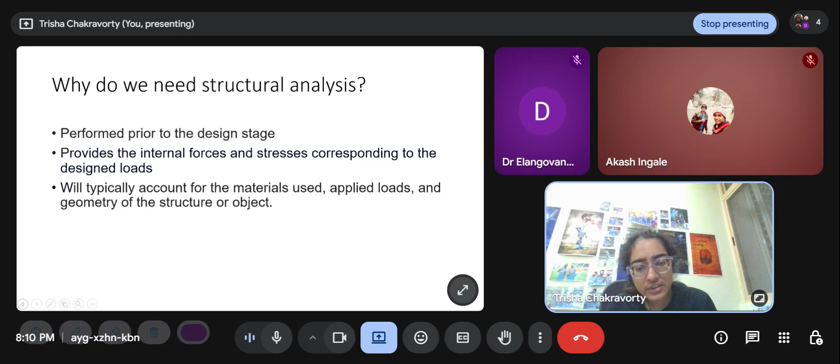Ultimately, our job as structural engineers is to do structural design, and structural analysis is a step before that. So it is performed prior to the design stage. It provides the internal forces and stresses corresponding to the design loads, and it also provides the deflections, typically accounting for the materials used, applied loads, and geometry of the structure.

Now we start with the overview of the course. Phase 1 was analysis of determinate structures, and phase 2 was analysis of indeterminate structures. Only week 12 is left. Tomorrow I'll be covering the topic of week 12, which is stiffness matrix method. Apart from that, we have covered everything. Now, phase 1, week 1.

Types of internal forces. There are four types of internal forces. There is axial force, which is a pulling or pushing kind of force along the length of the beam. Then there is shear force, which is transverse to the beam length, perpendicular to it. And there is bending moment, generally developed due to shear force. That is one. And there is torsion, which is this.

So torsion acts along the length of the beam. You can say that bending moment and shear force are both due to forces perpendicular to the length, and axial force and torsion are both along the length of the beam.

Then there are some common classifications of elements and boundary conditions. Classification of elements includes beams, trusses, and frame elements, the obvious ones. Trusses are made of two force members. All the members can only undergo axial force, so they can be in tension or compression, ensured by the way it is assembled geometrically. So all the members are pin jointed.

Beams typically undergo only bending moment and shear force, so we expect a beam to only have transverse loading, not axial loading. If it has axial loading, it becomes a frame element. But beams and frames are structurally not different, unlike trusses. Trusses have all members pin jointed, so the load is always redistributed such that all members act as two force members. But that is not true for beams or frames.

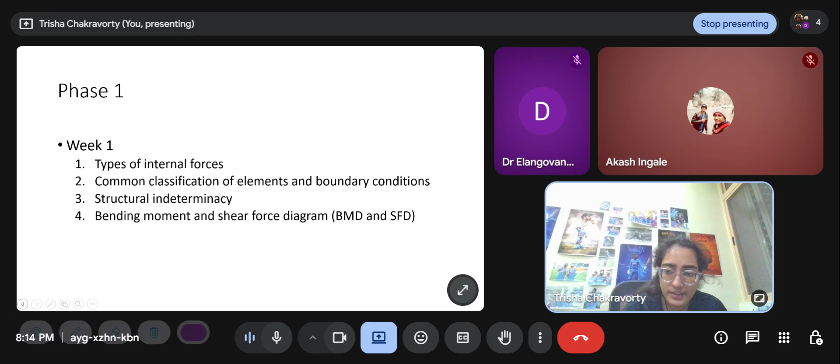Bending moment is moment that occurs when an external force is applied to the element, causing it to bend. Shear force is force that acts parallel to the cross section of a structural element when an external force is applied. Torsional moment is moment produced by a twisting force applied to the body along the transverse axis. And axial force is force that acts in the direction of the axis of a body.

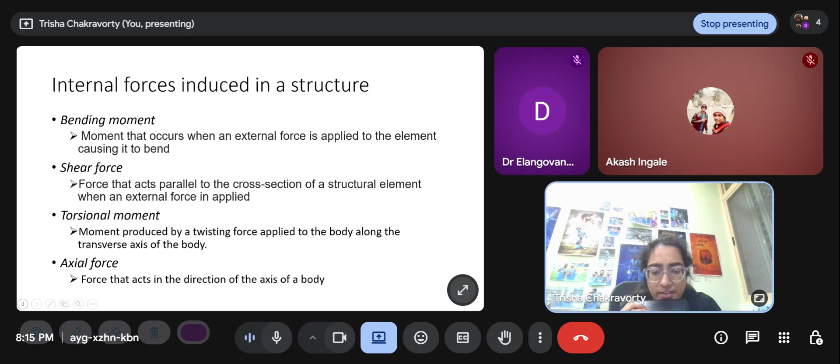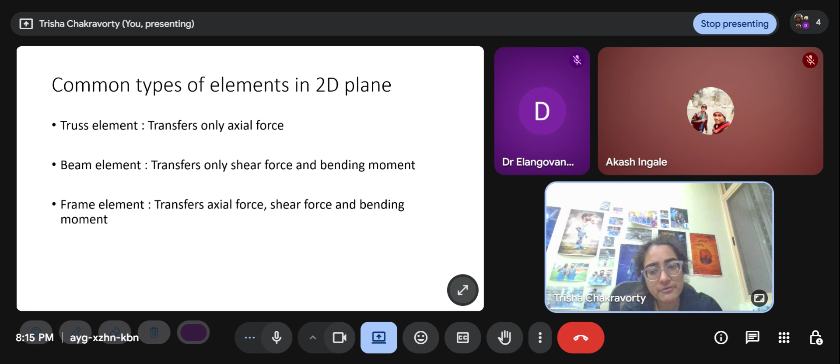Truss element transfers only axial force. Beam element transfers only shear force and bending moment. Frame element transfers axial force, shear force, and bending moment.

Roller support restricts displacement only in the direction perpendicular to it. Hinge support restricts displacement in both directions but not rotation. And fixed support restricts displacement in both directions and out of plane moment as well.

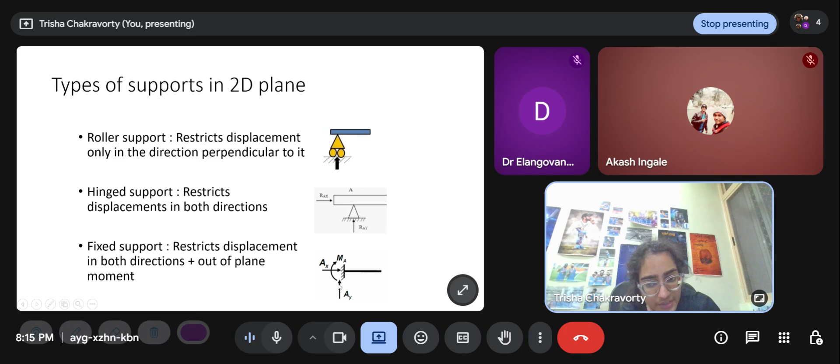Structural indeterminacy: structures that cannot be analyzed using statics or equations of equilibrium only are called indeterminate structures. They require other material properties to be solved. The degree of indeterminacy is the number of unknowns minus the number of equations of equilibrium - this is the static indeterminacy. External indeterminacy and internal indeterminacy add up to give the total degree of structural indeterminacy.

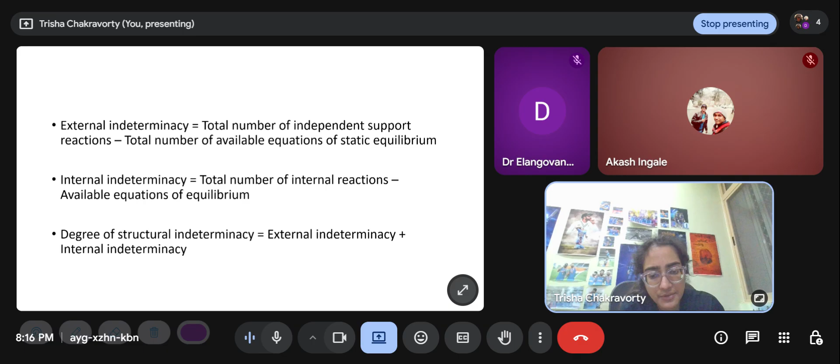Examples: this is a cantilever beam. It is determinate since it has three equations of equilibrium. In the 2D plane, it is always three: sigma fx equal to 0, sigma fy equal to 0, and sigma mz equal to 0. And there are three support reactions here - the fixed support gives one horizontal restraint, one vertical restraint, and one moment restraint. So it's a determinate structure.

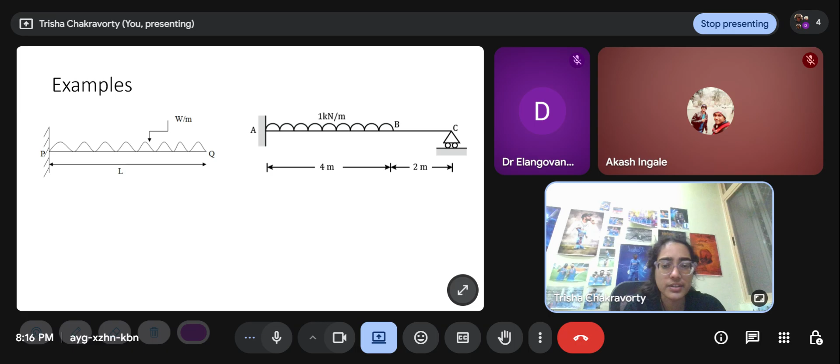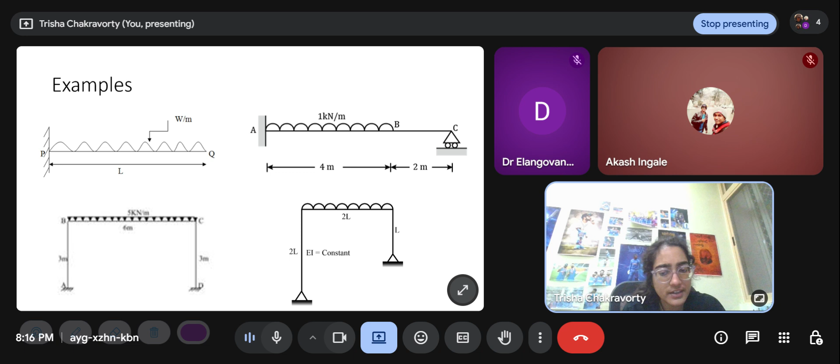Internal forces in beams: shear force and bending moment. Now, to visualize shear force and bending moment...

We need to cut a section. When you cut a section, because it's an internal force, it won't be visible if you look at the body from the outside. You need to go inside, cut a section, and see what is happening at the interface of the section.

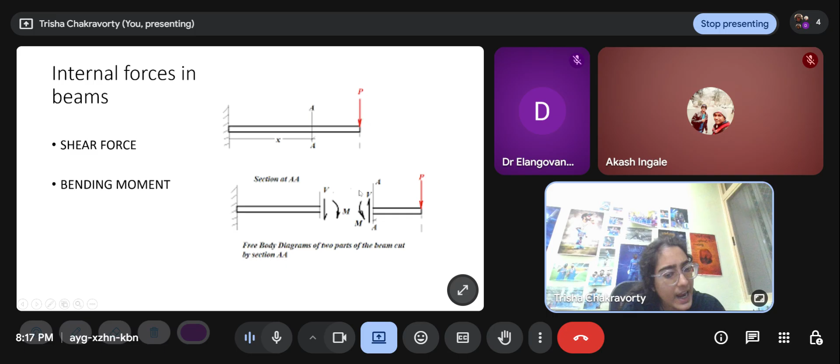The sign convention is important. For bending moment, when you come from the left, clockwise moment is positive, and when you come from the right, anti-clockwise moment is positive, and vice versa. For shear force, when you come from the left, upward is positive, and when you come from the right, downward is positive, and vice versa. This gives us the shear force diagram and bending moment diagram.

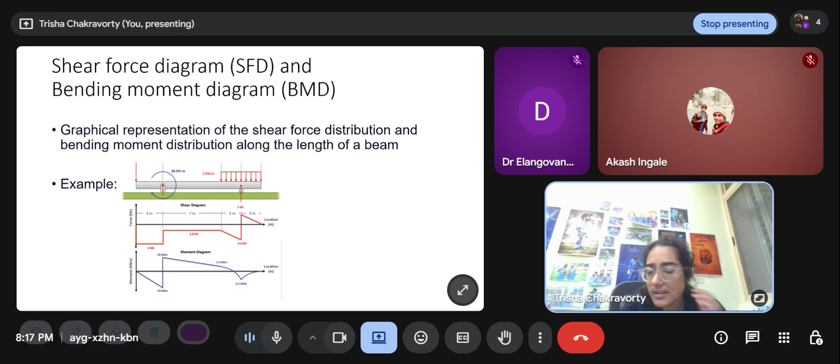Now, graphical representation of shear force distribution and bending moment distribution along the length of a beam. Here is an example. We have already looked at detailed examples in the first class.

Okay, week 2. We move on to week 2, which was about trusses.

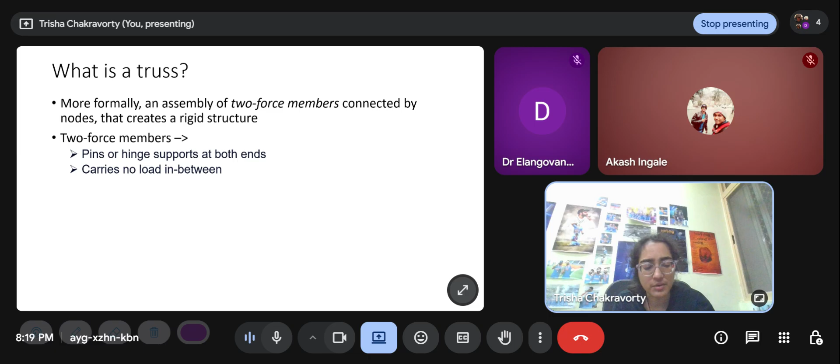Only two forces act upon them at the hinges. Each member is only under axial loading, no shear, bending or torsion. So however the force at the joint may be, it will ultimately align along the length of the truss.

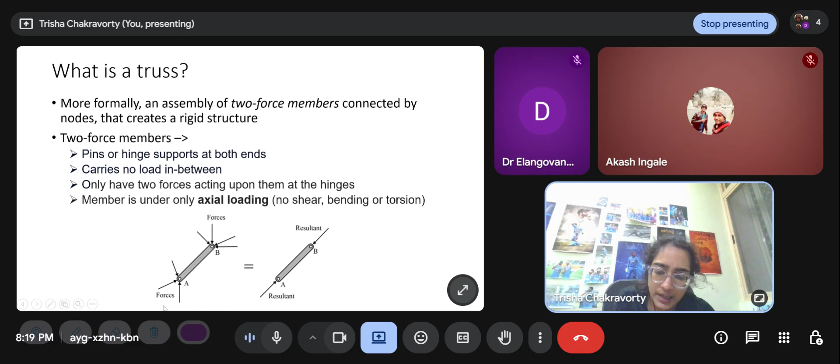Types of axial loading: tension attempts to elongate the member, compression attempts to shorten the member. This is quite easy to visualize.

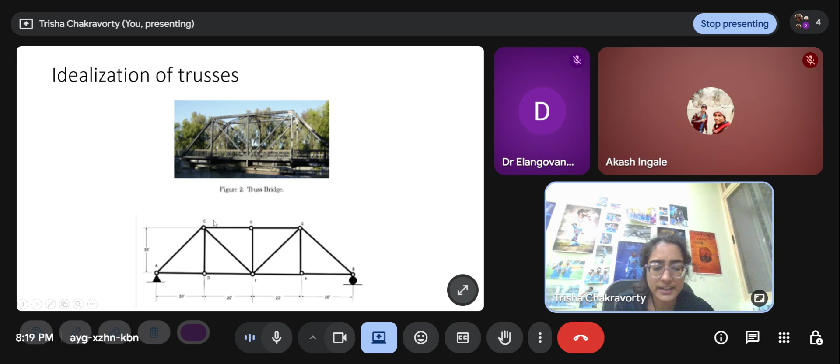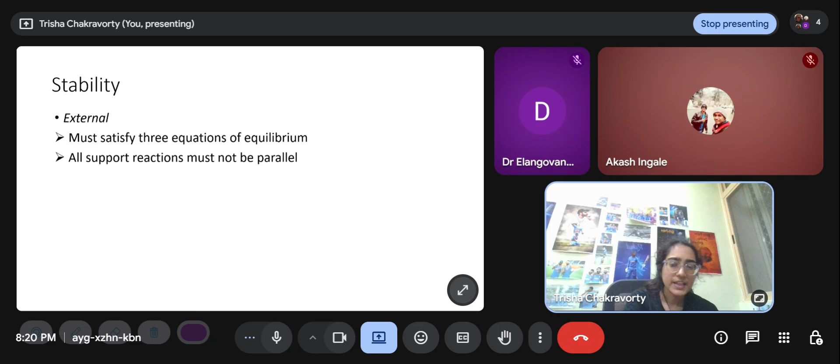Stability: externally, it must satisfy three equations of equilibrium. All support reactions must not be parallel, because in that case, whatever the direction of support is, if you put even a small force perpendicular to that direction, it will move. All supports must also not be concurrent, because if that happens, there's a rotational instability—if there is a moment along this, it will just rotate.

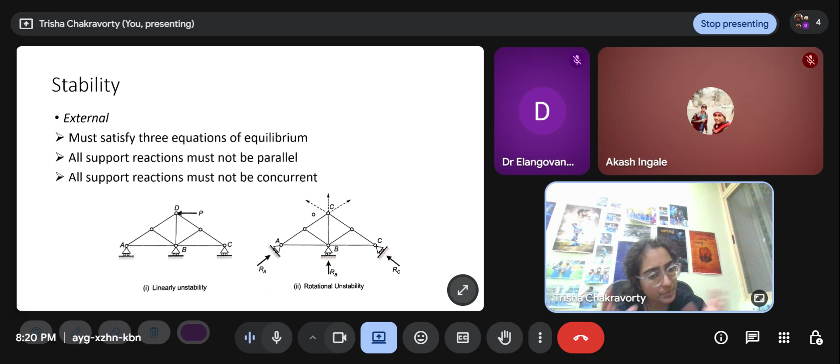So instability is any sort of rigid body motion. Deformation is allowed, but rigid body motion is not allowed in structures, at least when we are doing static analysis. Internally, no part of the truss can move rigidly relative to another part.

The number of members needed for geometric stability is M equals 2j minus 3. So the degree of structural indeterminacy of a truss is calculated as M minus 2j plus 3. We know that.

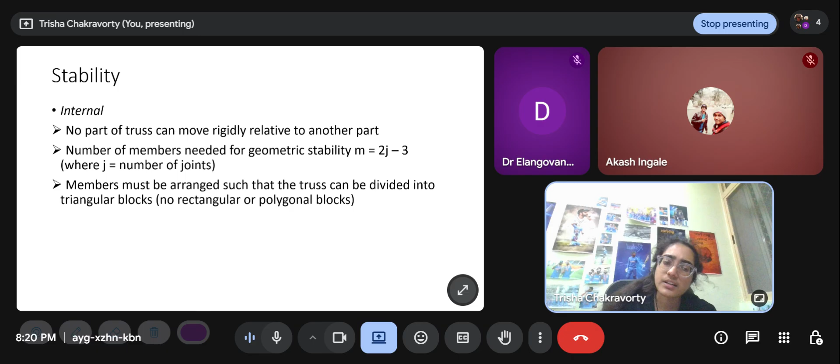Members must be arranged such that a truss can be divided into triangular blocks, not rectangular or polygonal blocks. If you just put this in the formula, it will appear that we need 9 members, and we have 9 members. But this part is overly stiff, overly reinforced, and this part is very unstable, because if you put a force like this, it will crumple inside. So we have to take one member from here and give it to here or here.

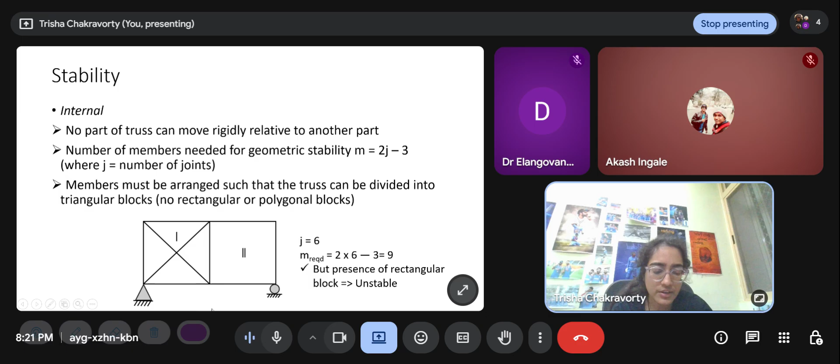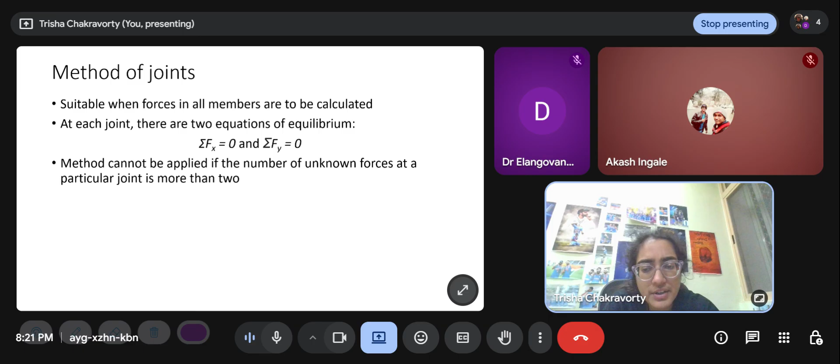Method of joints is suitable when forces on all members are to be calculated. At each joint, there are two equations of equilibrium: sigma fx equal to 0, sigma fy equal to 0. This method cannot be applied if the number of unknown forces at a particular joint is more than 2. Sign convention: for tension, arrows point away from each other; for compression, arrows point towards each other.

A method of joints is suitable when forces in all members are to be calculated. At each joint, there are two equations of equilibrium. This method cannot be applied if the number of unknown forces at a particular joint is more than 2.

So you have to approach it in such a way that we start with a node where there are only two unknowns. Then once you find out those two member forces, you can move on to the next joint, which may have had three unknowns before, but now has a known member force. That's how we progress.

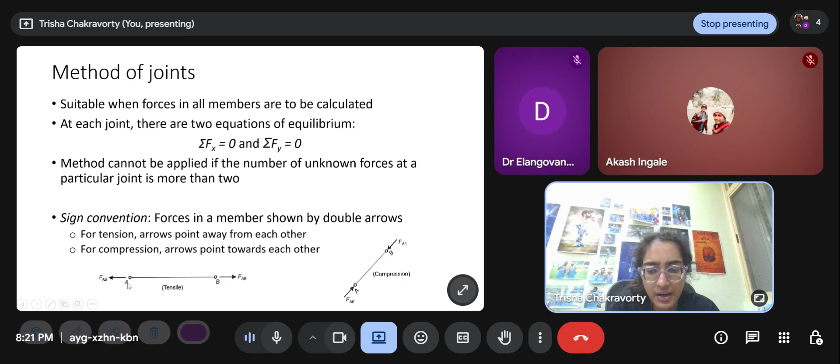This is the sign convention: for tension, away from the node; for compression, towards the node.

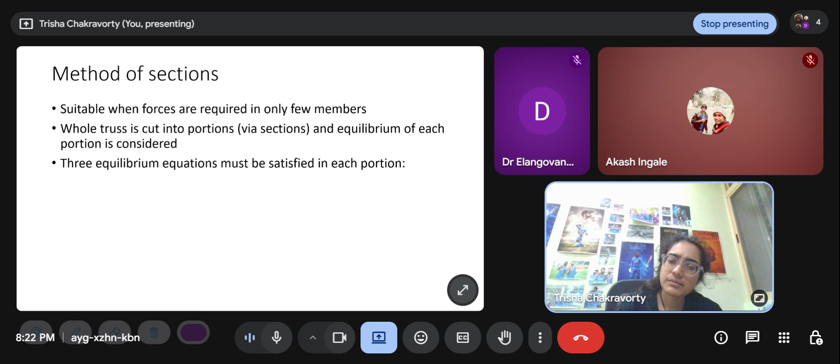Method of sections is suitable when forces are required only in a few members. The whole truss is cut into portions via sections, and equilibrium of each portion is considered. Three equilibrium equations must be satisfied in each portion: sigma fx equal to 0, sigma fy equal to 0.

Phase 3: the first principle of virtual work, unit load method, to determine displacements in truss.

Work done by a force: consider a force and a displacement direction ds, with angle theta between them. As the force direction changes and the displacement direction might also change, the work done is the integral of fx dx.

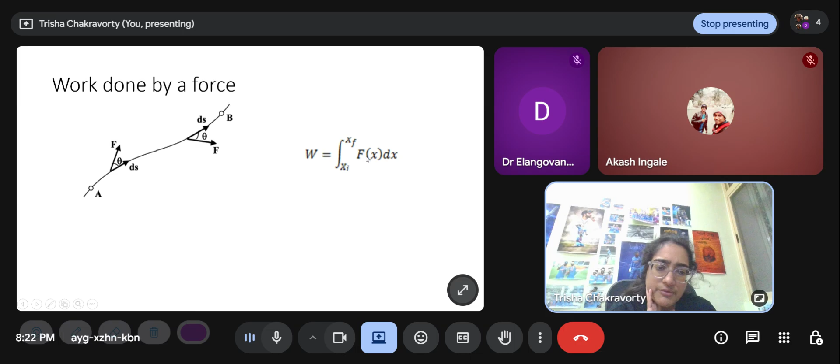A conservative force has work done that is path independent, for example gravity. A non-conservative force has work done that is path dependent, for example friction. The work done by friction depends on the length we are dragging the block through.

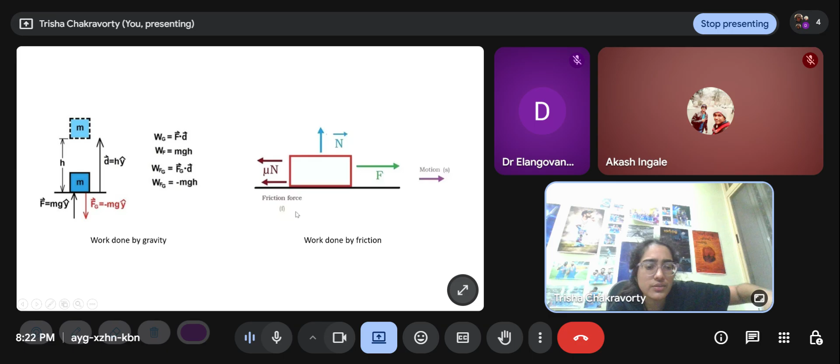If it is gravity, whether you drop a ball straight down or it goes up a zigzag path, the work done will ultimately be mgh anyway. So this is a conservative force, while friction is a non-conservative force. If you take a block through a longer route, it will undergo more frictional resistance.

At equilibrium, a structure deforms such that its potential energy is minimized. External loads equal internal forces, and external work equals internal work.

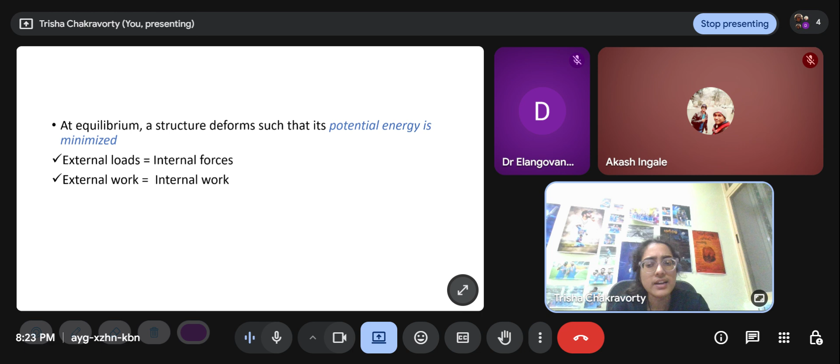Principle of virtual work: the work done by a real force acting through a virtual displacement, or a virtual force acting through a real displacement. It states that in equilibrium, the virtual work of forces applied to a system is zero.

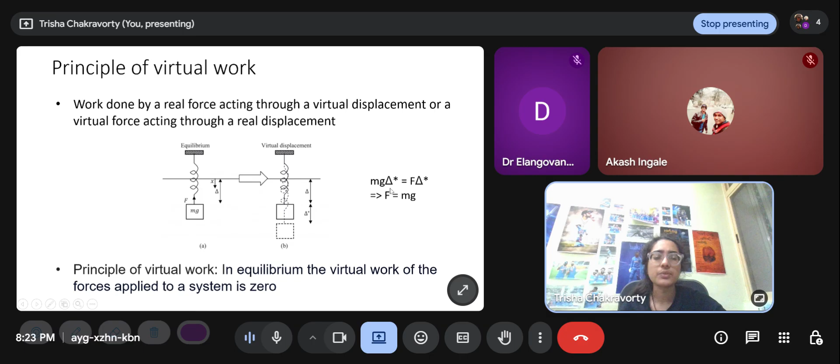We already know that for equilibrium F equals mg from force considerations, but even from the principle of virtual work, the concept is that mg delta star equals F delta star, so F equals mg.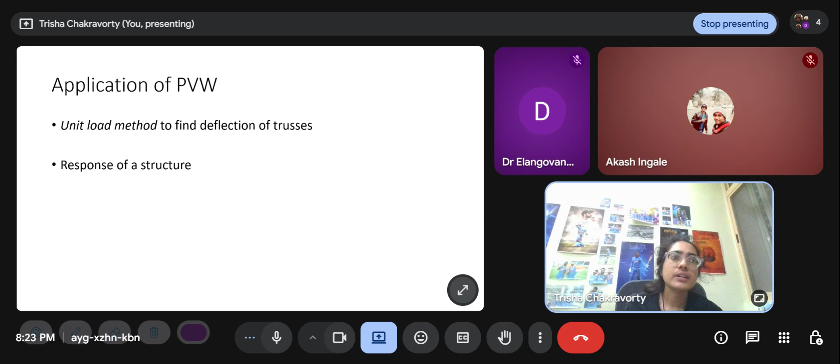The application of this principle of virtual work is the unit load method, used to find deflection of trusses, response of a structure, forces or stresses, and displacement or strains.

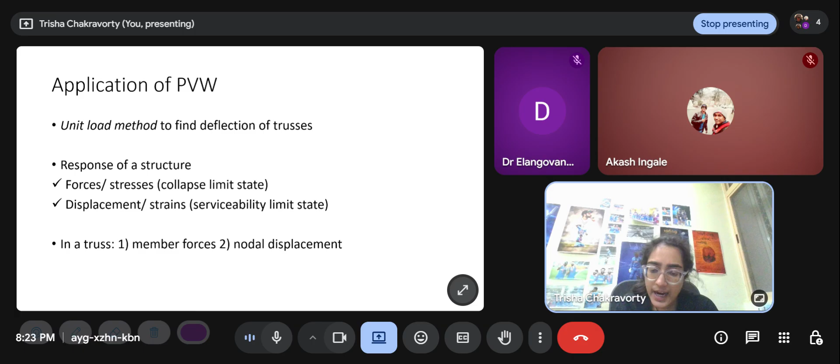In a truss, member forces are one type of response, which we have seen in method of sections and method of joints, while nodal displacement is a displacement type response found through the unit load method. It is a technique to quantify displacements or rotations of the equilibrium configuration of a structure, that is, the shape of the structure after it has managed to equilibrate the applied loads.

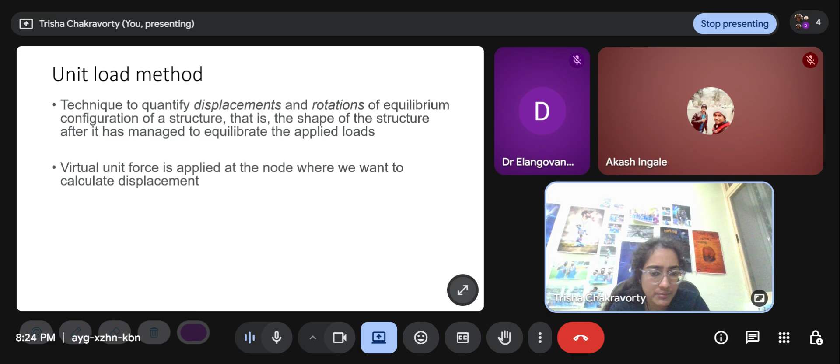A virtual unit load is applied at the node where we want to calculate displacement. So if I want to find the x displacement at a particular node, I put a one kilonewton load in that direction at that node. It can be applied one way or the other; ultimately the sign will give us the actual direction. If I want to find the y displacement at the same node, I have to put a one kilonewton load in the vertical direction.

Analogically, a virtual unit moment is applied to the node where we want to calculate slope. This is not valid for trusses because in a truss there is only x or y displacement at the nodes, but for a beam the unit load method is applicable to find displacement-type response in any structure. So if you want to find the slope at some point, you can apply a 1 kilonewton-meter moment at that point and analyze in the same way.

For unit load, external virtual work is 1 into delta, and that is how we get the delta. Since external virtual work equals internal virtual work, delta is the internal virtual work.

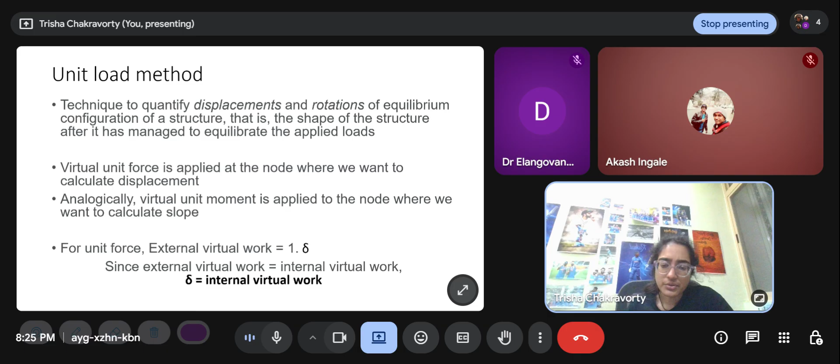The steps, without going into detail, ultimately require drawing a table with a P system of forces, a K system of forces, and a column of L, A, E, so that you can find P, K, L by A, E for each member, add those up, and get the delta at whichever point you have applied the load.

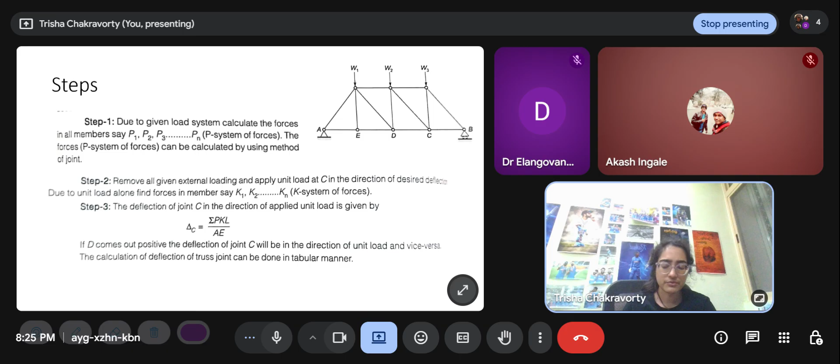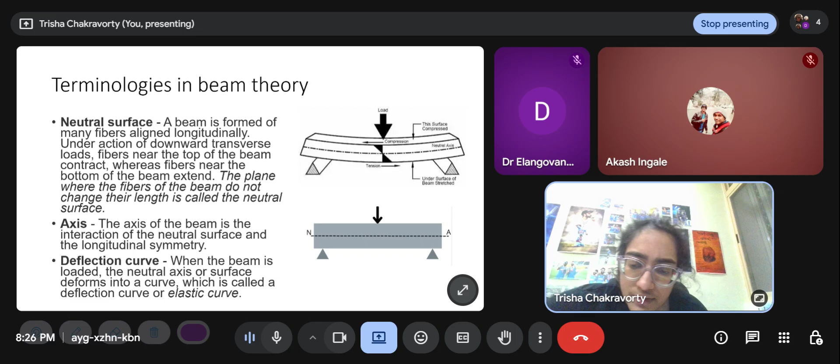In beam theory, there's the neutral surface, neutral axis, and the deflection curve. Suppose this is a beam - the neutral surface will be somewhere here, and this entire line is the neutral axis. Imagine you cut the beam; the neutral surface is where the surface cuts through, and the neutral axis is the line on that cut surface. Once the beam deflects, the curve that the neutral axis follows is formally called the elastic curve or deflection curve, which represents the deflection of the entire beam.

Euler-Bernoulli beam assumptions: the beam is infinitely rigid in its own plane, the cross section of the beam remains plane to the deformed axis, and the cross section remains normal to the deformed axis. All these you just need as theory - remember this because you might get questions in GATE or similar exams, but you generally don't need direct applications of this. Generally the questions will be numericals; this is just part of the theory you need to remember.

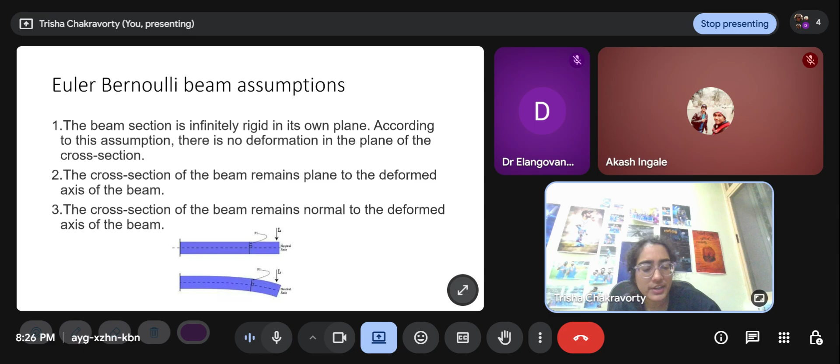These two properties, E and I - material property and geometry property - are important because they are the two properties we use during design to make a structure not fail. If a beam fails in my analysis, I can either give it a stronger material, increase the grade of concrete or steel, or I can increase the dimensions, make it deeper or wider - that would be a geometric property.

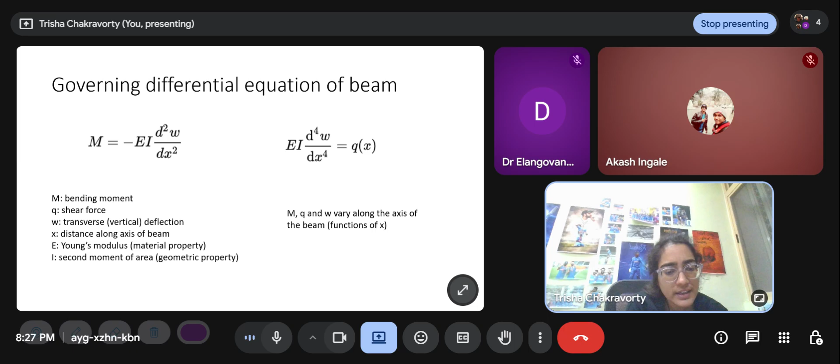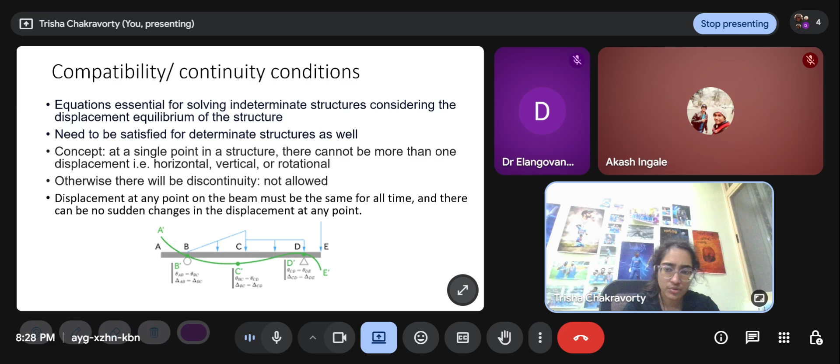The moment area method - theorem 1 says that the change in slope between any two points on the elastic curve equals the area of the M/EI diagram between these two points.

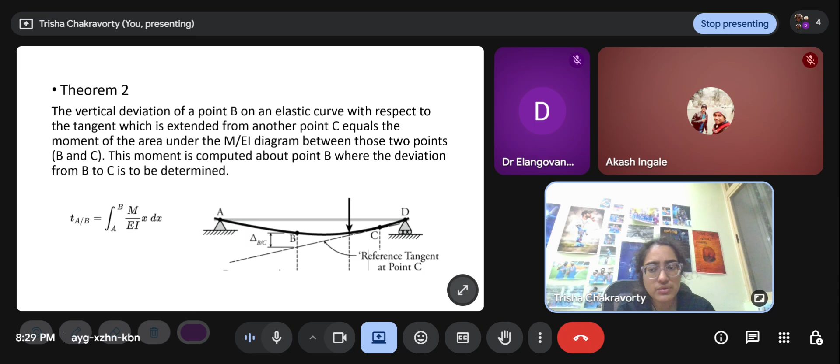Theorem 2 says the vertical deviation of a point B on the elastic curve with respect to the tangent extended from another point C - it needs two points, but it needs a tangent at one of those points - equals the moment of the area under the M/EI diagram between those two points. This moment is computed about point B, where the deviation from B to C is to be determined.

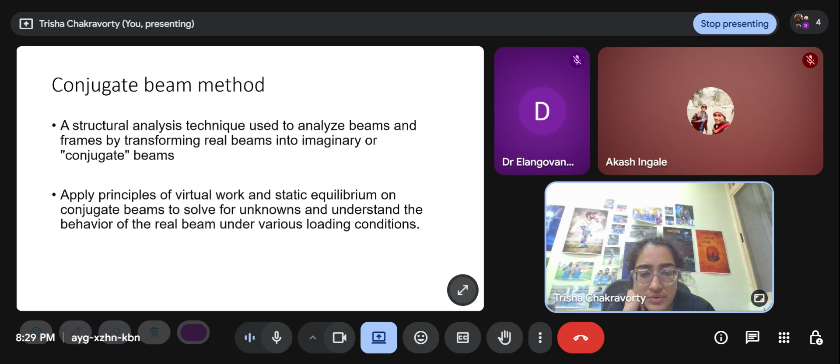Conjugate beam method is a technique used to analyze beams and frames by transforming real beams into imaginary or conjugate beams. Moment area and conjugate beam methods are essentially the same - they implement the same concept in two different approaches. Most people are comfortable with one of the two, but you can be asked either one, so do learn these methods properly. We apply the principle of virtual work and static equilibrium on conjugate beams to solve for unknowns and understand the behavior of the real beam under various loading conditions.

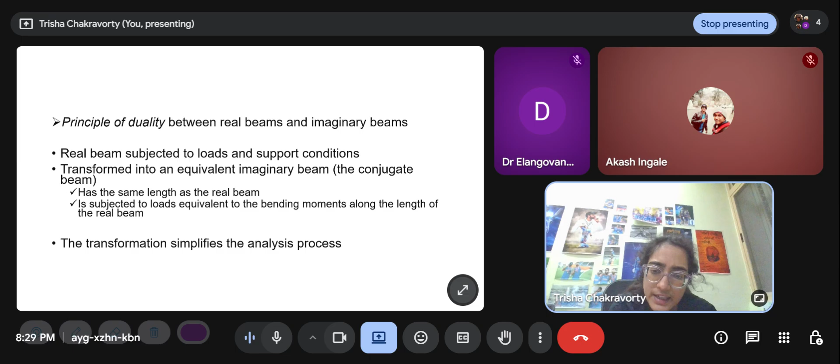It is a principle of duality. The real beam is subject to loads and support conditions, which is transformed into an equivalent imaginary beam that has the same length and is subjected to loads equivalent to the bending moments along the length of the real beam. So the M/EI diagram of the real beam is the load on the conjugate beam, and the sign convention is the same as the bending moment diagram.

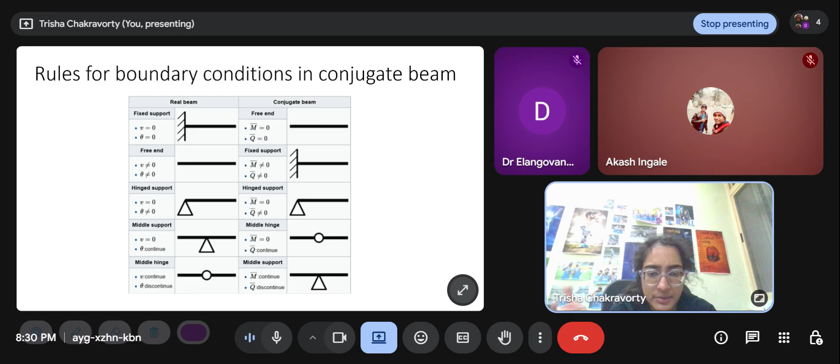There's a rule of duality for the boundary conditions: a fixed support becomes free, free becomes fixed, a hinge remains hinged, and a knife edge or middle support becomes an internal hinge, and vice versa. The last topic of phase 1, determinate structures, was the influence line diagram.

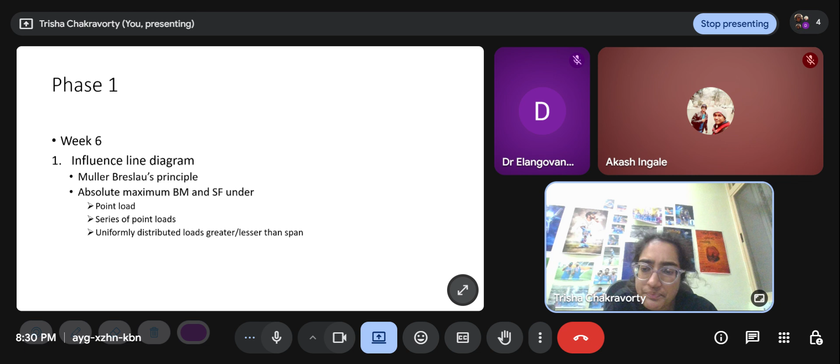There are two types of loads, dead loads and live loads. Dead loads are the self weight of the structure and the flooring - stationary and constant loads. They do not change over the lifetime of a structure.

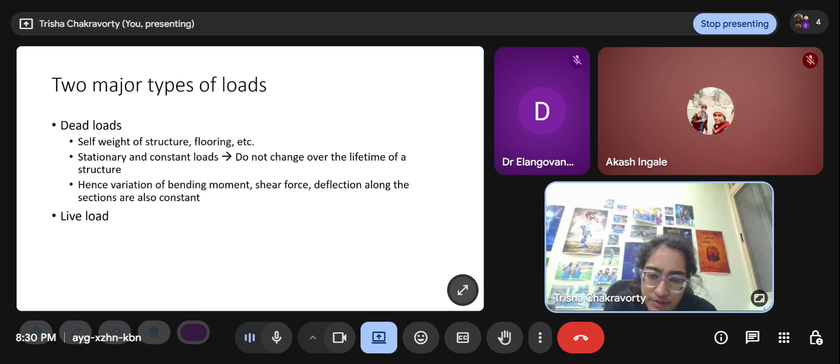Hence variation of bending moment, shear force, and deflection along the sections are also constant. So far, all the analysis we've done considered that the position of the load doesn't change, meaning we were working with static loads. But live loads, like furniture and people's weight in buildings, or wheel loads and passenger weights in bridges, are always moving, so we need some way to analyze moving loads.

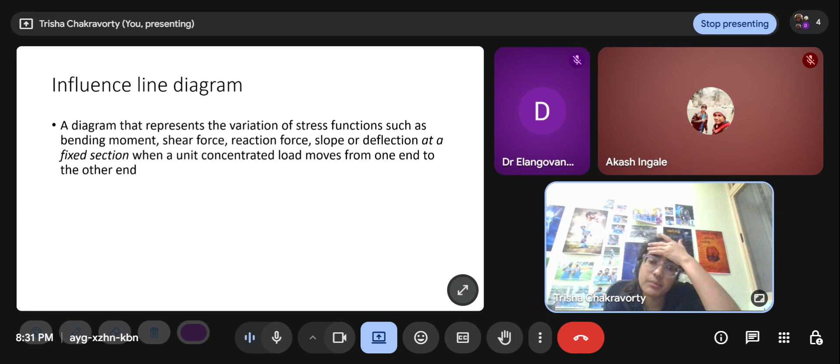The influence line diagram, or ILD, is the way to do that. It's a diagram that represents the variation of stress functions such as bending moment, shear force, reaction force, slope, or deflection at a fixed section when a unit concentrated load moves from one end to the other end.

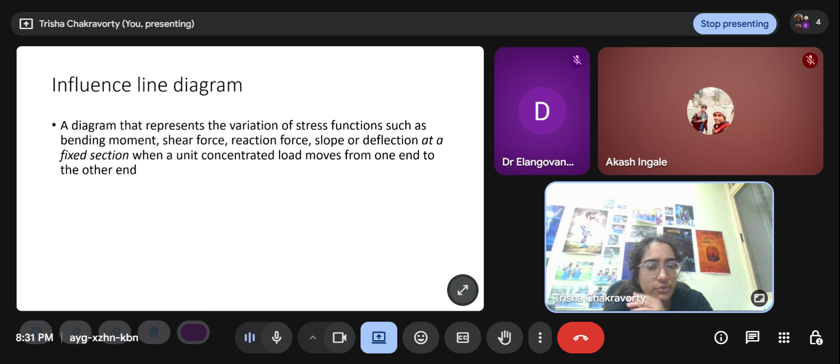Now, when drawing a diagram, we cannot both move the load and the section. For bending moment and shear force diagrams, the coordinate at any point represents the value at that section. But for an influence line diagram, we have to fix the section so that we can imagine the load is moving, and that's why the diagram is changing.

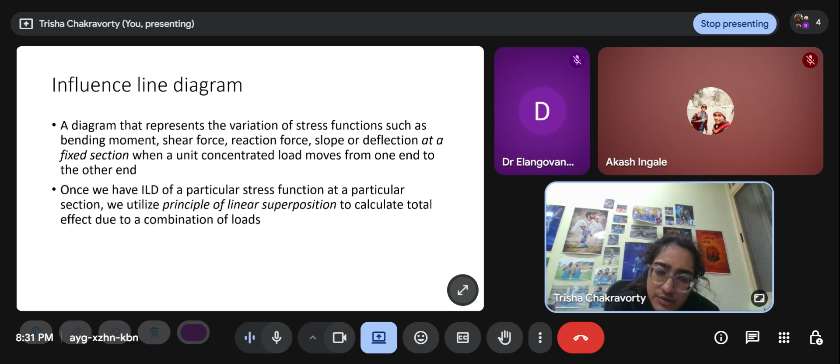Once we have the ILD for a particular stress function at a particular section, we utilize the principle of linear superposition to calculate the total effect due to a combination of loads. Then phase two was about indeterminate structures. We'll go into that.

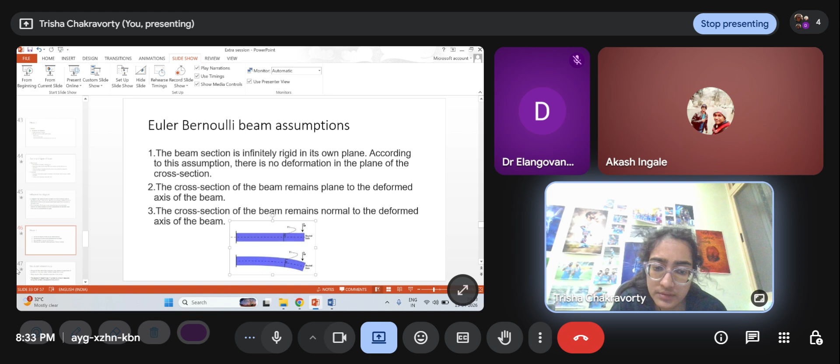Hello, ma'am. Yes, just one second. Any problem? Okay, okay, yes. Do you have any doubt? No, no, no, okay. Just one second, ma'am. It's fine, it's fine. Just...

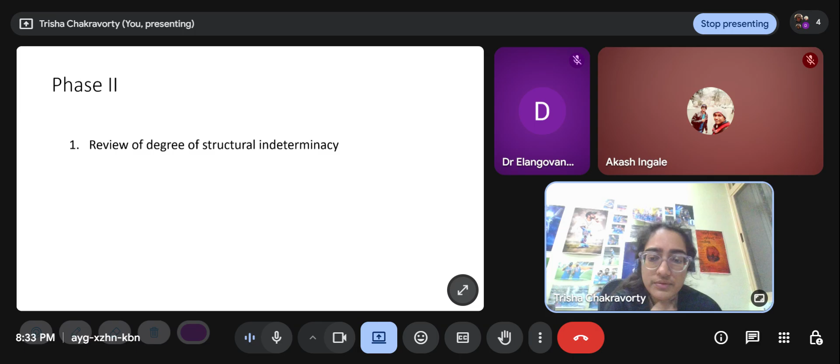So, phase two, we started with review of degree of structural indeterminacy, introduction to force and displacement methods, Maxwell-Betti's reciprocal theorem, and method of consistent deformations, which is a force method.

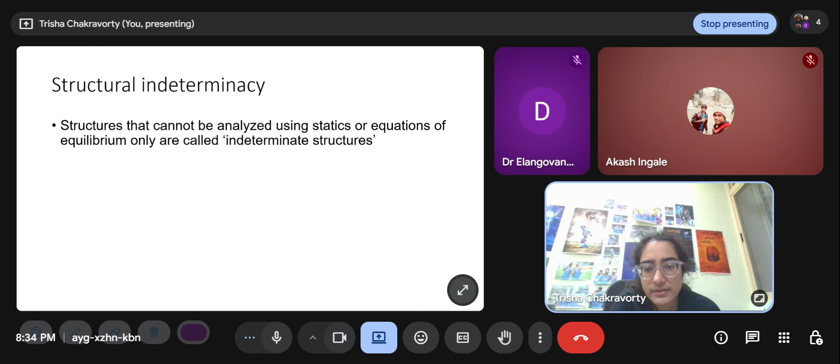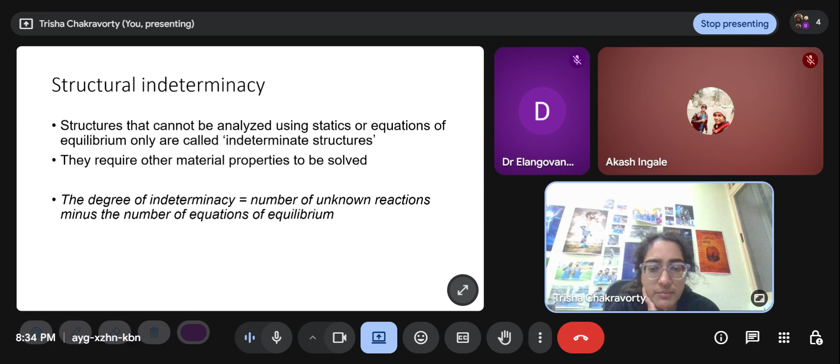Structural indeterminacy: structures that cannot be analyzed using statics or equations of equilibrium only are called indeterminate structures. They require other material properties to be solved. The degree of indeterminacy is the number of unknown reactions minus the number of equations of equilibrium. We've already looked at this in recent weeks, so I won't go into much detail.

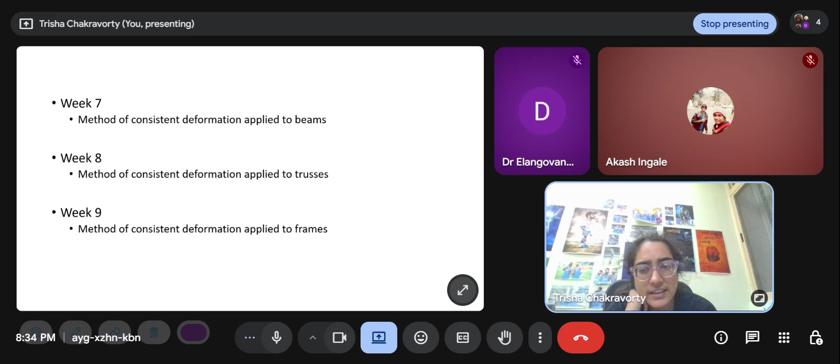In week 7, method of consistent deformation was applied to beams, then trusses, then frames, and the overall framework remains the same. This is a force compatibility or flexibility method, and there are many types, but we generally focus on method of consistent deformation only.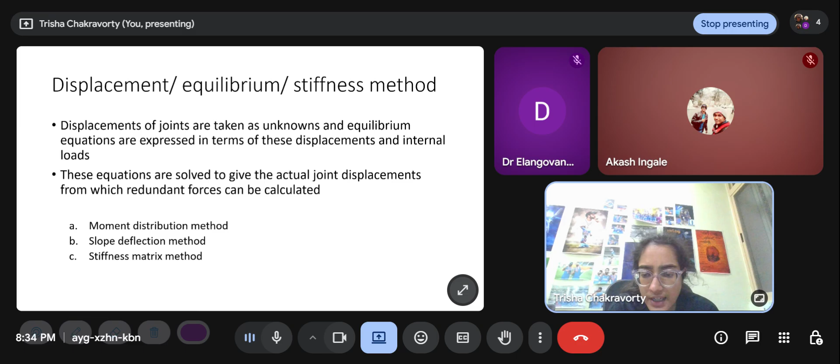And displacement, equilibrium, or stiffness methods include moment distribution, slope deflection, and stiffness matrix. All three are important, and we have to study the stiffness matrix method in the last class of the session, which is tomorrow. These are the differences between the two methods, summarized.

For force methods, unknowns are taken as internal member forces or reactions. For displacement methods, unknowns are taken as joint displacements. To find unknowns in force method, we write the compatibility conditions, while in displacement methods we write the equilibrium conditions. That's why displacement methods are also called equilibrium methods, and force methods are also called compatibility methods.

This method is suitable when the degree of static indeterminacy is lesser, as we've seen that the number of unknown forces, the number of additional redundant forces, is the degree of static indeterminacy. So that is the number of extra equations we need in the force method.

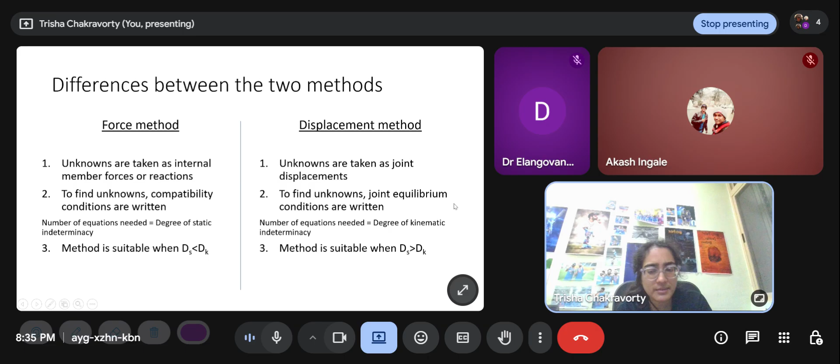In displacement method it's the opposite: the number of additional degrees of freedom is the degree of kinematic indeterminacy, and that's the number of additional equations we need. So this method is suitable when degree of static indeterminacy is greater than degree of kinematic indeterminacy, because obviously we want to solve fewer equations.

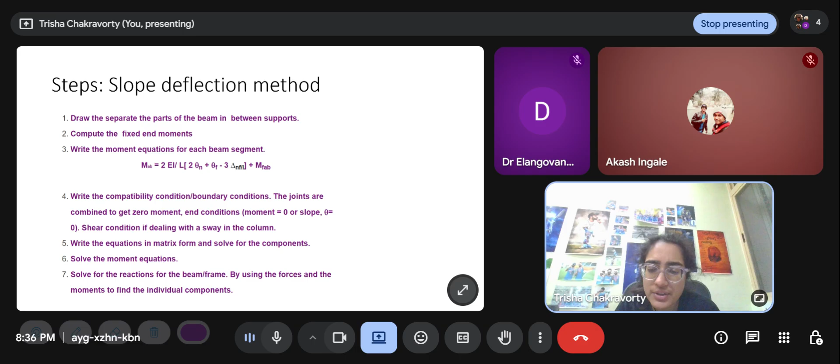Then slope deflection method we looked at 3 weeks ago, and moment distribution method we looked at last week, so I won't go into these details because I hope you have practiced them recently.

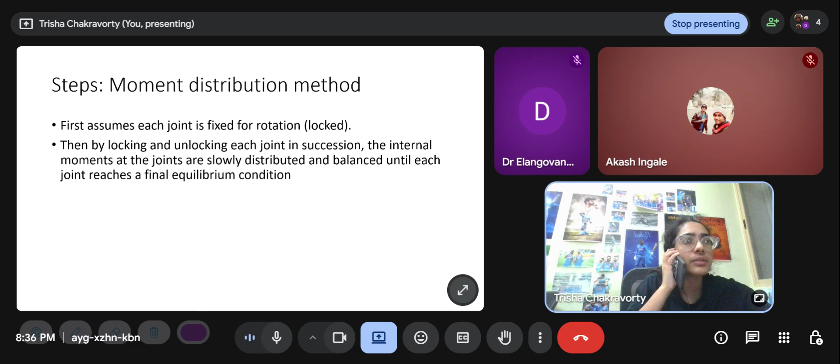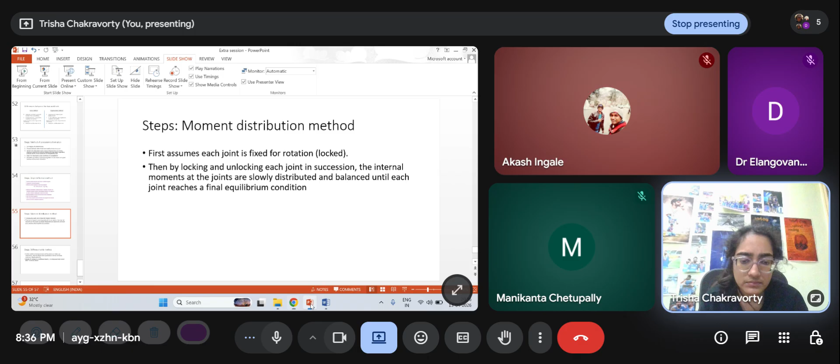And finally, the stiffness matrix method we will look at tomorrow. I didn't go into the details of these because we have just discussed them for the last 2 weeks. So, are there any questions?

Okay, if there are no questions, I will end the class. Tomorrow we'll discuss the stiffness matrix method, which is the last topic of the course.

Thank you. Yes? A student asks: Ma'am, please explain the conjugate beam method. Okay, I'll go to the conjugate beam method lecture then.

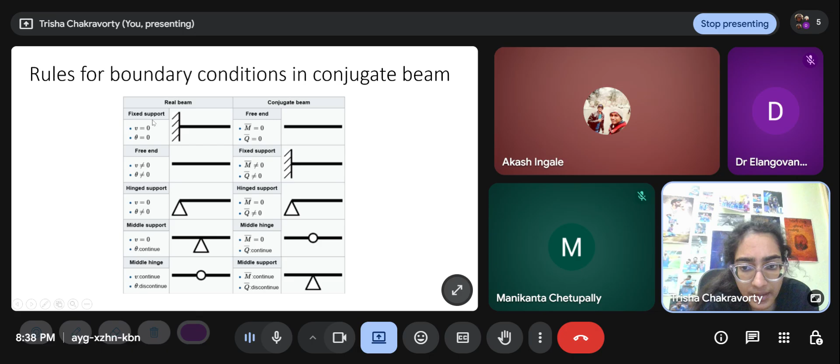Now the other thing to do is the length. The length remains the same - that is in the theory of conjugate beam, that the real beam and the conjugate beam lengths will be the same. So I draw a 12-foot beam, I put a triangular loading, and then I have to address the boundary conditions. So it says here that a fixed support will become a free end in the conjugate beam, and the free end in the real beam will become a fixed support.

Now that I have this, I can find out the bending moment and shear force at any section of this beam, right? You're capable of doing that once you have this.

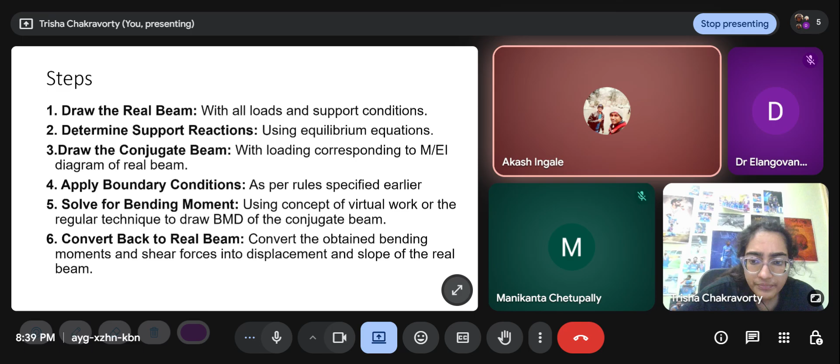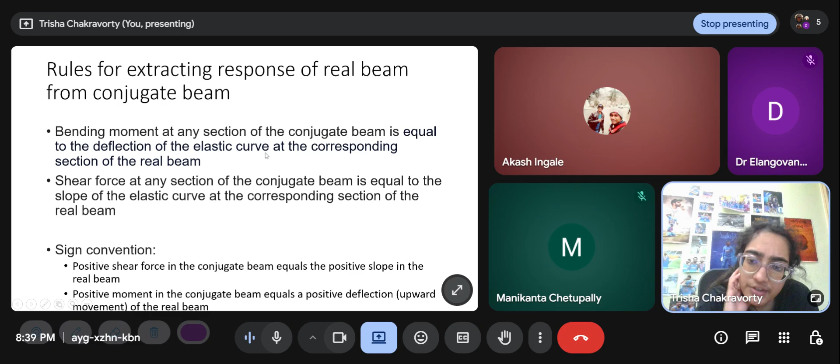And what does the conjugate beam theory say? One second, where is it? So it says that now the rules for extracting the response of the real beam from the conjugate beam: bending moment at any section of the conjugate beam is equal to the deflection of the real beam at that section. So if I tell you to give me the deflection at this free end, you will first draw the conjugate beam, and then find the bending moment at this section. That magnitude will be equal to the deflection at this point in the real beam.

And for the rotation - if I ask you the slope at the free end A - then you have to find the shear force at A of the conjugate beam, and the magnitude will be equal to the slope.

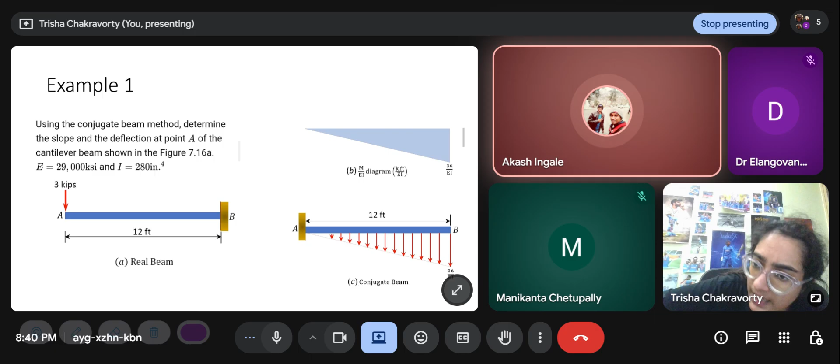Student: In this, is it a virtual work method, ma'am? Teacher: Virtual work - see, actually, ultimately, these are all virtual work methods. The concept comes from the same place, but this is not explicitly a virtual work method. It is just called the conjugate beam method.

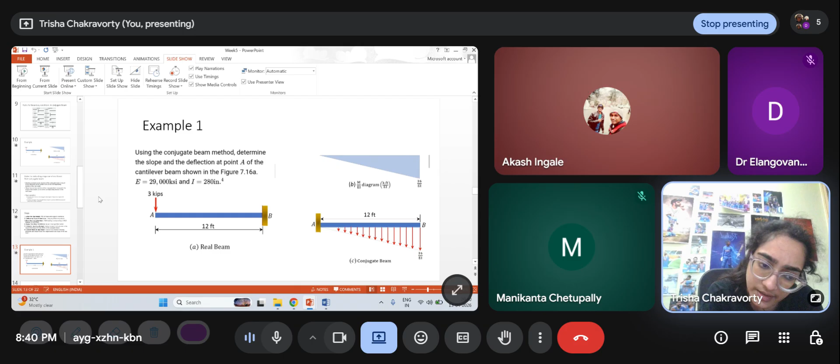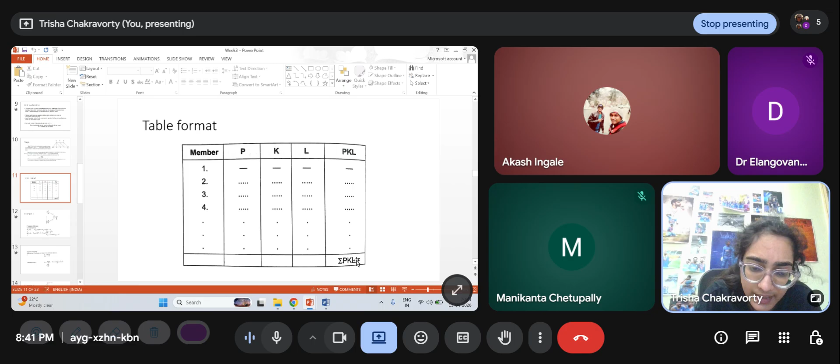Student: But is the virtual work method, the unit load method, provided or not? Teacher: The unit load method is applicable for any structure - it is applied for trusses, beams, or frames. But the unit load method, explicitly, is what we studied in week 3 by drawing the table - we actually did it only for truss, drawing a table like this and finding sigma pkl by AE, right? Similarly, applying a similar concept, we can do it for beams as well. You just have to change some of these things, like the AE in the denominator will become EI for beams. You can find that in any book, but it can be used.

Virtual work method can be used to find out slope and deflection in any structural elements.